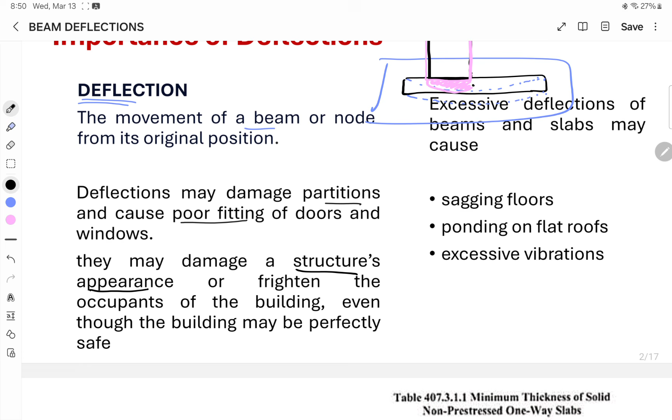You can clearly see it when there's sagging - bending in beams, structures, or slabs. It can frighten the occupants of the building - of course, who wouldn't be scared when it bends, even though the building may be perfectly safe. Excessive deflections of beams and slabs may cause sagging of floors, ponding on flat floors, flat roofs, and excessive vibrations.

NSCP gives the minimum beam depth, which I discussed with you before. Minimum thickness of solid or non-prestressed one-way slabs: for simply supported, we use minimum h of L over 20. For one end continuous, we use L over 24, both ends continuous L over 28, or for cantilever, L over 10.

This expression is applicable for normal weight concrete and Fy of 420. So our Fy here should be 420. If your Fy changes, it's no longer applicable. For Fy other than 420, the expressions in this table shall be multiplied by 0.4 plus Fy over 700. For example, the given is...

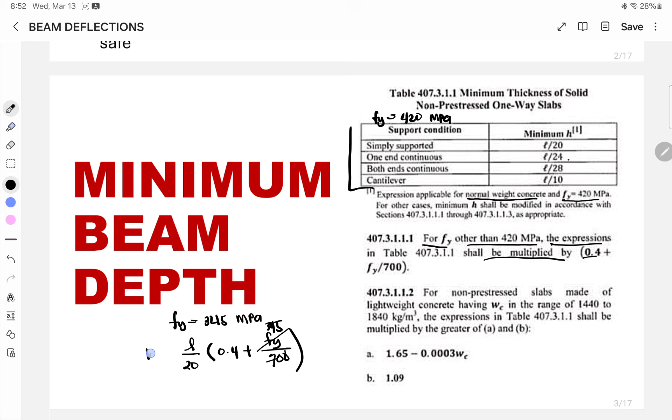Fy is 345, since it's not always 420 that's given to us. So what you do is check the support condition first. If it's a simply supported beam, we use L over 20, but multiply it by 0.4 plus Fy over 700, where our Fy is 345, to get the minimum depth of our beam. Okay.

So next we have the maximum deflections. If the designer chooses not to meet the minimum thickness given in the previous table, he or she must compute deflections. If this is done, the values determined may not exceed the values specified. So this is the limit of our deflection.

We have 4 items here, which also came from ACI and was adapted by NSCP. So we have the types of members, deflections to be considered, and then the deflection limitations.

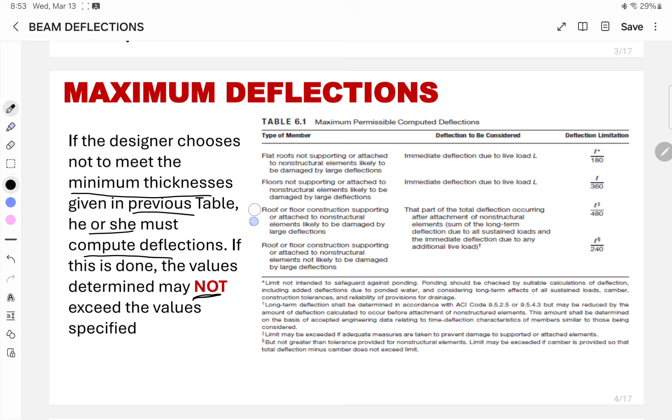The deflection of structural members is due mainly to the dead load plus the live load. So the total deflection we consider here is equal to the deflection of the dead load plus the deflection of the live loads. That's how we consider it.

The deflection that occurs immediately upon the application of the load is called the immediate or instantaneous deflection, which is our focus. According to the NSCP, immediate deflections shall be calculated using methods or formulas for elastic deflections, considering effects of cracking and reinforcement on member stiffness.

So the modulus of elasticity of the concrete shall be permitted in accordance with this section. For concrete it's Ec, and for steel it's Es. Whenever it's indicated as such, it becomes concrete.

The values of the density or unit weight between 1,440 and 2,560 use this formula. So if a unit weight or density is given, just use this formula, plug it in along with the given FC prime, to get your Ec.

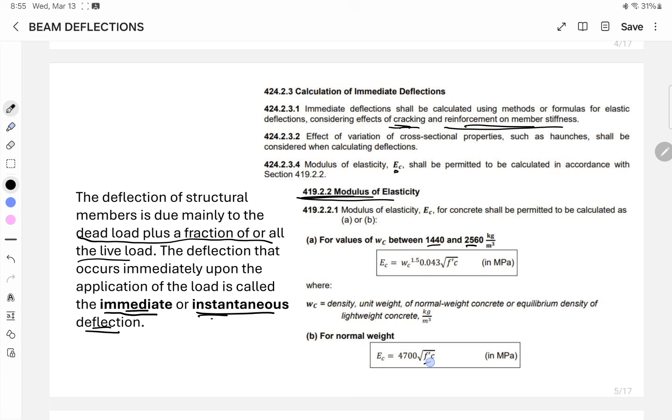Let's move to the crack moment of inertia. Mostly, for example in a simply supported beam, the maximum deflection and maximum moment are always at the center. From our theory, we have M-max. When the moment diagram looks like this,

the flexural cracks here are more numerous compared to the sides. So with that, to analyze it properly, we make a transformed area or transformed section, wherein the transformed section is the section of steel and concrete transformed into a homogeneous section.

From the word homogeneous section, this is our cross section. Then this is the transformed cross section, wherein the transformed cross section is a homogeneous section.

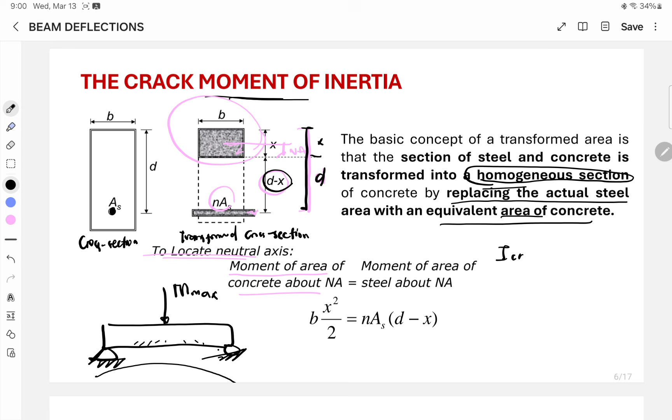Ay, ito na pala, sinulat ko na lahat. So, skip muna natin to.

Dito muna tayo sa modular ratio. Yung modular ratio natin, as you can see, meron kayong n AS is equal to the equivalent concrete. Yung n natin dito is the modular ratio, it is used to transform area concept. It is the ratio of the modulus of elasticity of steel all over modulus of elasticity of the concrete. It may be used to the nearest whole number, may not be less than 6, so hindi tayo mag-less than ng 6.

Ito yung naging equation natin o yung derivation ng n. It is equal to, or the AC is equal to n AS. So we have the equilibrium, AS FS, AC FC, and then strain compatibility, wherein ito na yung n, baliktad, kaya napunta siya dito, o nasa denominator siya. Tapos itong AS FC is just the n.

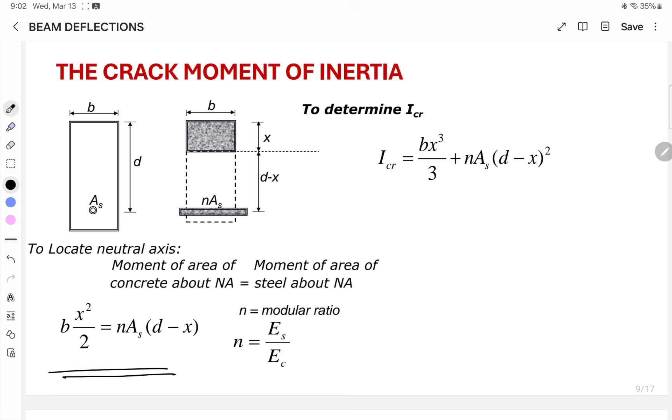So, to determine the ICR, wherein meron na tayong ito, ito yung gagamitin natin para makompute natin yung value of x. Since di natin alam yung location ng x, gagamitin natin yung nakuha nating equation galing dito sa location of neutral axis, where itong b is given, x lang yung unknown natin.

So, with that, pag na-compute natin yung x, punta tayo dito sa ICR, wherein it is the cracked moment of inertia, na meron tayong value ng bx cubed over 3 plus n AS, d minus x, squared.

So saan ba siya galing? Saan ba nyo na-discuss ito, sa statics, mechanics? Basta yung ating ICR is just the moment of inertia, wherein magta-transform moment of inertia tayo. We have the summation of the IG, o the gross inertia, kabuuan, plus AD squared, wherein yung AD squared natin, yan yung magta-transfer ng moment of area.

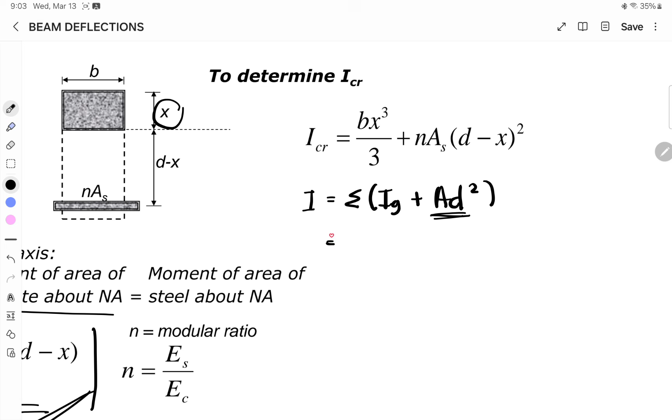So from our figure, ito, we have the IG, wherein yung IG natin is ito na, b, the base, bh cube, x yung height, over 12, plus...

Derive na to, using this formula, ito. Since ang mangyayari lang naman is ilalagay natin lahat ng area, gross area, tapos yung maliit na area na to, as hindi na i-consider, pero ang mangyayari, mali-derive na siya into this equation. So mangyayari, ito na din yung matitira: n AS, d minus x raised to 2, wherein ito na yan, AD squared.

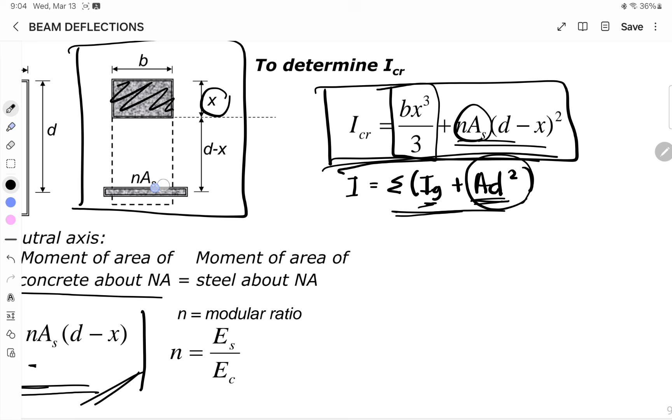So para mapabilis na natin yung discussion, basta ito na yung tatandaan nyo. We have the bx cube over 3, and then plus n AS, d minus x raised to 2.

Sinulat ko na yung derivation niya para baka tanungin nyo pa ako. Dito, ito na yung IG ng una, tapos meron naman tayong pangalawa, wherein yung pangalawa natin, yung initial gross natin, since maliit lang naman yung ito, maliit lang naman siya, yung height niya is super liit lang, tapos i-cube pa natin, so mas liliit pa siya, so approximately equal to 0 na yung nandito.

Kaya dito, hindi na natin kinonsider yung IG ng transform o yung NAS natin. So ang matitira sa atin is ganito ang equation: you have the bx cube over 3, wherein ito na yon, tapos ito na yon.

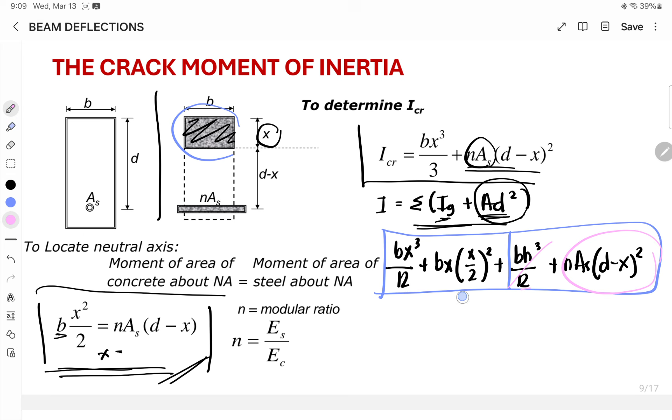Okay, so ayan, patuloy lang natin. Erase natin tong mga ito, erase ko na to ha, picturean nyo na lang, i-post nyo. Yan, ito na yung formula natin ng ICR: bx cube over 3 plus n AS d minus x raised to 2.

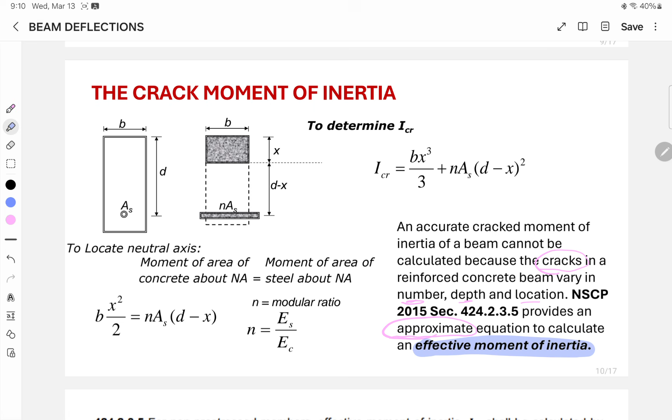Pero an accurate crack moment of inertia of a beam cannot be calculated because the cracks in a reinforced concrete beam and RC beam vary in number, depth, and location. So of course magbabago naman yung mga cracks natin. Kaya yung NSCP daw provides an equation, approximate equation to calculate the effective moment of inertia, so meron tayong tawaging effective moment of inertia na may symbol na IE.

So next, for non-pre-stress members, the IE shall be calculated by this equation, unless obtained by a more comprehensive analysis, but IE shall not be greater than IG. So ang IE daw natin is less than or equal, shall not be greater than IG, dapat ganun yung mangyayari, wherein meron tayong mahabang formula ng IE: MCR over MA raised to cube, IG, plus 1 minus MCR over MA raised to cube, times the ICR. So mayroon ditong mnemonics.

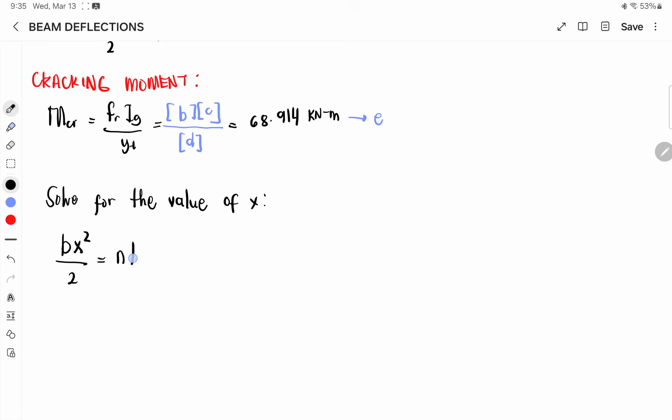bx squared over 2... n AS d minus x squared. Ay, bakit may x squared? Wala yung squared.

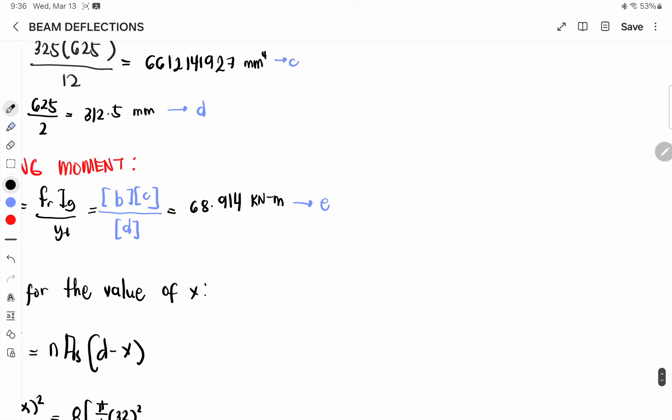B natin is 325. X natin is unknown. N natin is 8. AS natin, di pa natin na-compute, no? Lagay na lang natin dito: pi over 4 times 32 squared... 32 ba? 25, 25 nga. Times 8.

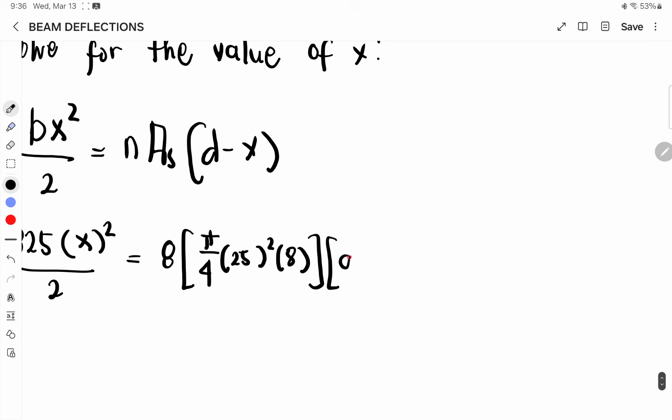D. Ano yung D natin? Given, we have 525 minus X, wherein yung X natin is equivalent to... Shift, solve. We have 236.264 mm.

Therefore, makakompute na tayo ng moment of inertia. Papalitan natin ng kulay.

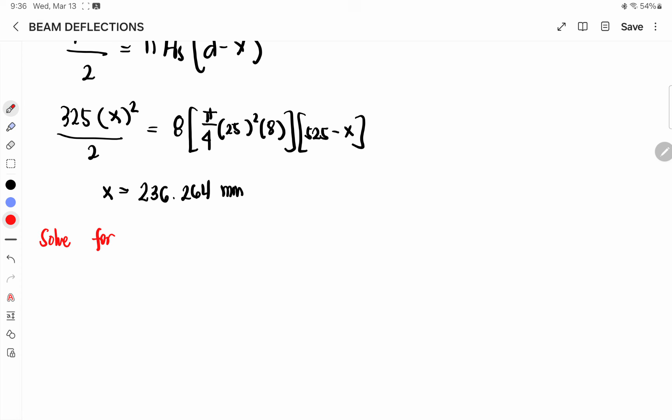Solve for cracking, or effective, or tama, crack moment of inertia.

Wherein meron tayong ICR is equal to summation of IG plus AD squared. We have the IG of the first: bx cube over 12 plus AD squared. We have the B, x times AD squared natin is x over 2 squared plus AD squared, since yung isa, yung kanina in-neglect na natin yun since 0 na yan, no? Magiging NAS D minus X squared.

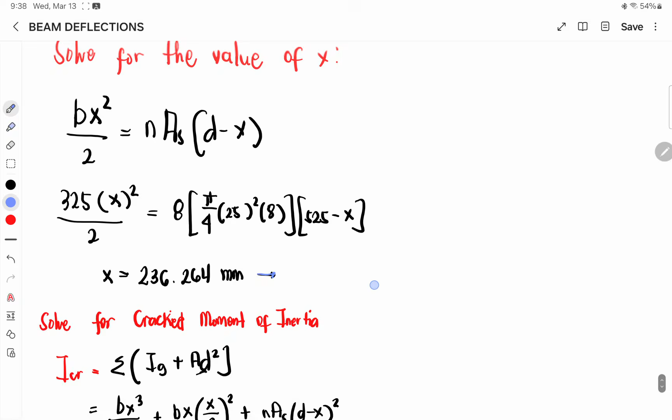Tama. So ito, store nyo muna into letter, ano na tayo? Letter D. Letter D, EFG, EF. B, 325. X natin is letter F. Cube over 12, okay lang. B, 325. X natin is letter F.

Wherein meron tayo ulit letter F over 2 squared, okay lang. Ayun na ta. Plus N, we have the 8. AS natin, store nyo din to: EFG. Para huwag na kayo mahirapan pa. G.

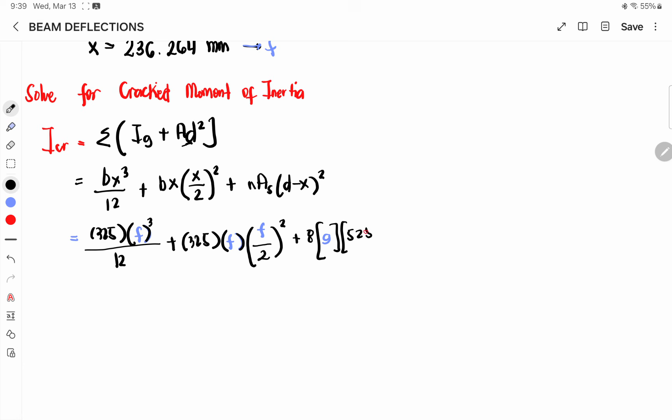D natin is 525 minus F squared. ICR is equivalent to 4047843102 mm raised to the 4th. ICR, no? Moment of inertia in the crack section. Kaya mm squared siya... mm to the 4th pala.

Tapos, makakompute na tayo ng instantaneous deflection.

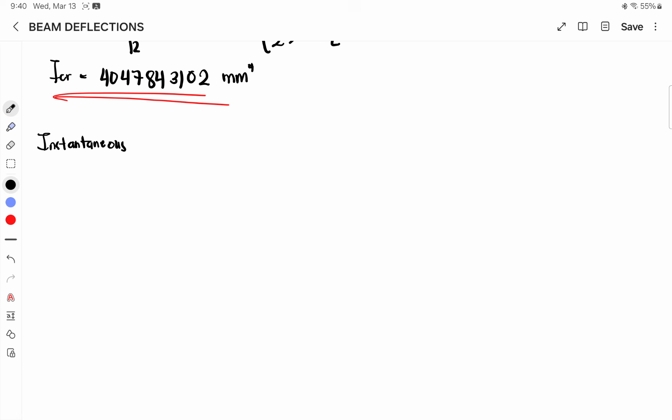First, compute na muna natin yung formula muna pala. IE, MCR over MA cube, plus ay buo, plus ano, 1 minus sira, ay sira. Anong kulang pa dito? Meron tayong MCR, meron tayong IG, meron pa tayong ICR, wala pa tayong MA.

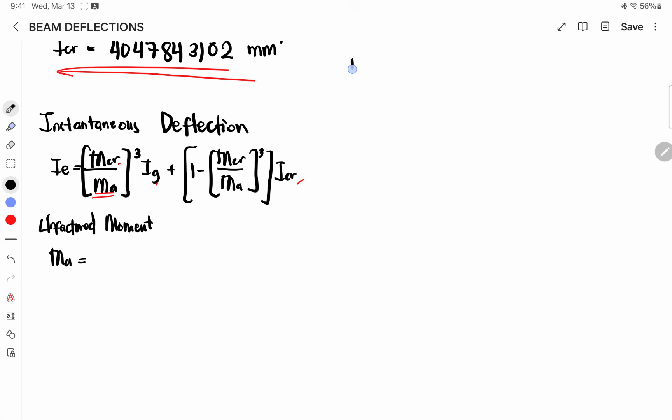The compute for the MA is just the unfactored moment. MA, wherein nasa yung moment natin, kapag sa simply supported is kapag may uniform load is WL squared over 8. Tapos kapag point load naman is PL over 4. So yan ay magiging moment natin: moment natin WL squared over 8 plus PL over 4.

We have the W na 6, dead load, and then the 9 is the live load. 12 squared over 8 plus yung dead load na point load 22 tapos over 4. MA natin is equal to 336 kN meter.

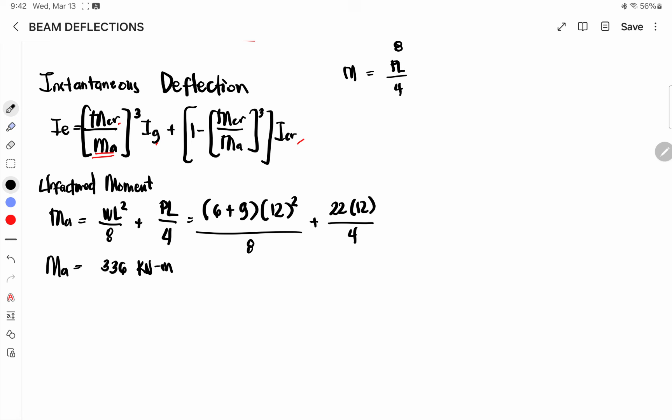Store sa letter EFG. May G pa ba? Wala na palang G, X na to. Hanap kayong G dyan, bahala kayo. So ito yung i-store nyo sa Y.

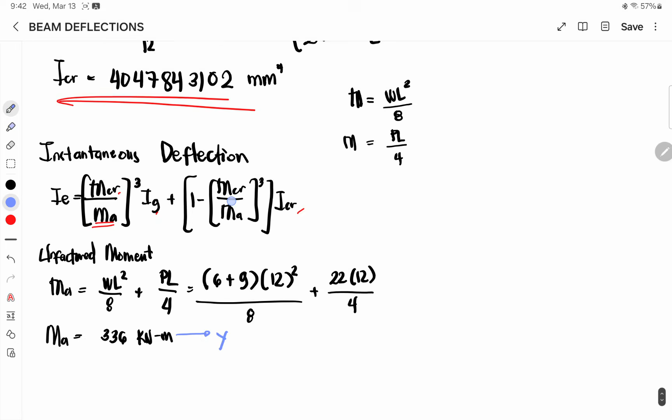Therefore, gamitin natin yung formula ng instantaneous deflection: MCR, wherein yung MCR natin is anong letter yun? Letter E. Tapos yung MA natin is letter Y, cube. IG natin is letter C. Huwag nyo kalimutan nyo na, ilagyan nyo ng label.

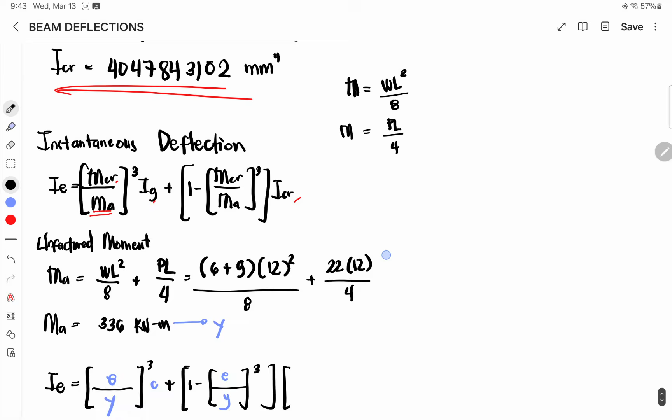Plus 1 minus E over Y, times ICR. ICR natin is, ay wala pa to. So dapat kada sagot lagyan nyo na ng value. So let's say M. So, M.

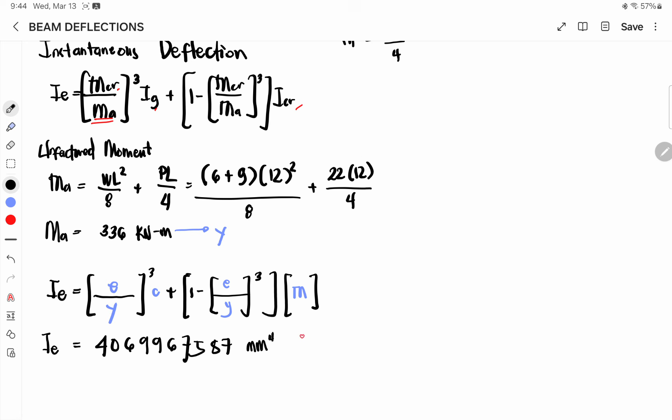Therefore, yung IE natin is equivalent to 4,000, 6,9,9,6,7,5,8,7, which is less than IG. Tama. Pero yung IG nyo is letter C. Balikan nyo yung letter C. O, 6,6. Ito, 4 lang. 4,0. Tama. So, next.

Lawak pala ito eh. Tayo sa kabila. Makakompute na tayo ng deflection.

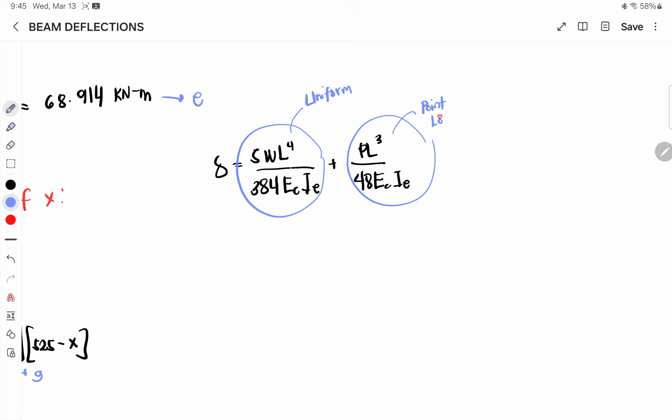Deflection, galing doon sa formula natin: you have the WL raised to the fourth, or 5WL raised to the fourth, times 384 EC times, or over IE, plus PL cube over 48 EC IE. Wherein ito is para sa uniform. So, ito naman para sa point load or concentrated load. Isang oras na pala ito eh.

Deflection natin is 5, we have 6 plus 9, L natin is 12 raised to the 4th, all over 384. EC natin is letter A. Ito, letter A. Tapos, IE natin is letter. Wala pa, natin lang letter. Ano pa ba? Number 1.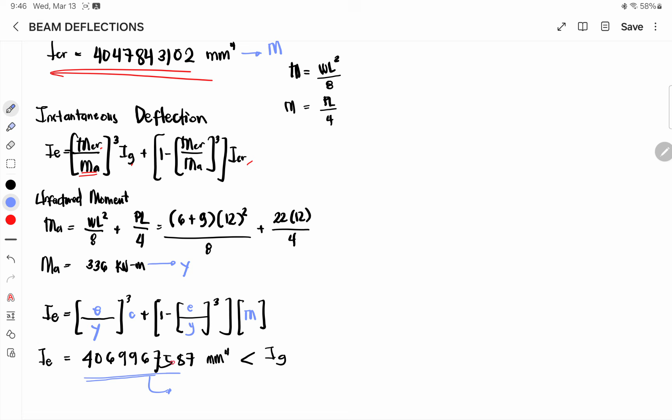Yan na yung EI plus P, 22, L, 12, 3 raised to the third power, all over 48. E natin is letter A, tapos 1, yung I. With that, yung deflection nyo is equivalent to 48.182 mm. Final answer.

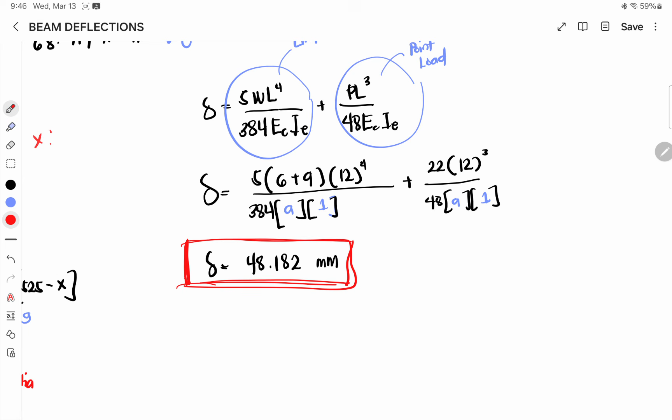Okay, ito yung formula, ito yung solution. So pagkapag tinamang naman instantaneous deflection of dead load lang, ang mababago lang natin dito is yung MA, unfactored moment. So ilalagay nyo lang dito is yung dead load lang, of course. As we substitute na dito sa MA nyo is dead load lang. Okay lang, so pag lahatan, edi lahat i-consider nyo, no?

Yan, so idagdag lang natin. Kunyari may tinanong, hindi na natin patagalin pa to, no? Pag may tinanong long-term deflection, patuloy na lang natin to, itong problem natin. Pag may sinamang calculate the long-term deflection assuming 20% of the live load of LL applied for 5 years or nth years, no? Or nth month. So sabihin natin 5 years din.

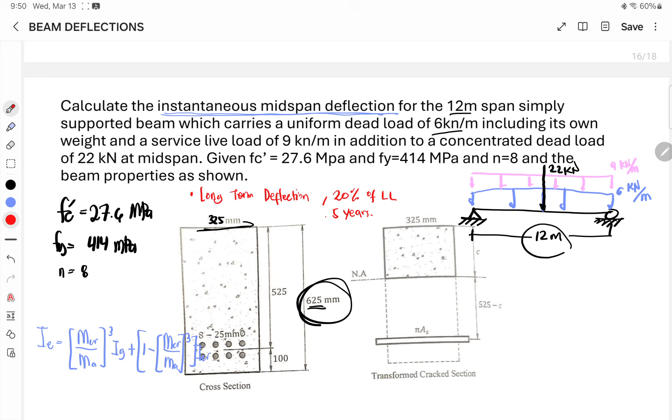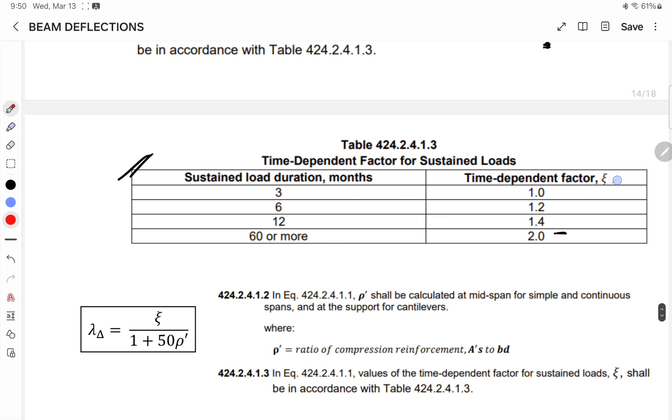So dito masi-check natin yung value ng lambda natin or yung xi pala. So patuloy na lang natin dito. Mababago lang since meron kayong given na 20% live load, tapos 5 years, no? Ang 5 years natin is equivalent to 5 times 12, meron kayong 60 months. Or kapag na-check natin dito sa xi natin, yung time dependent factor is 2.0. Parehas na siya, no? 2.0.

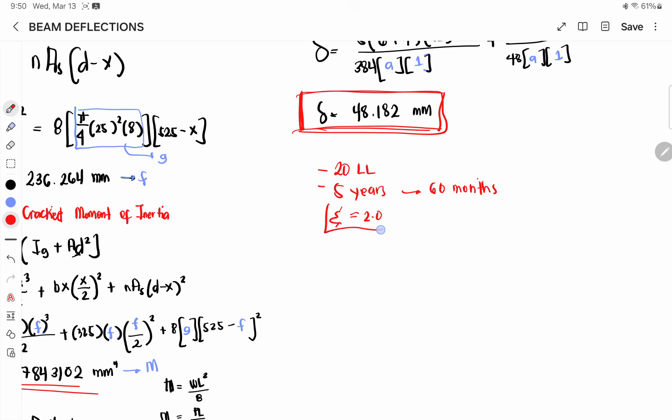With this, ang mababago lang naman is yung moment natin, yung MA natin. So anong mangyayari sa MA natin? Babaguhin lang natin siya. Wherein, kunyari, mag-add na tayo ng 0.2 na live load. So kunyari, meron kayong live load dito pala, ito, sana yung MA. Ito. Itong W natin dito, lalagyan lang natin siya ng 0.2 live load.

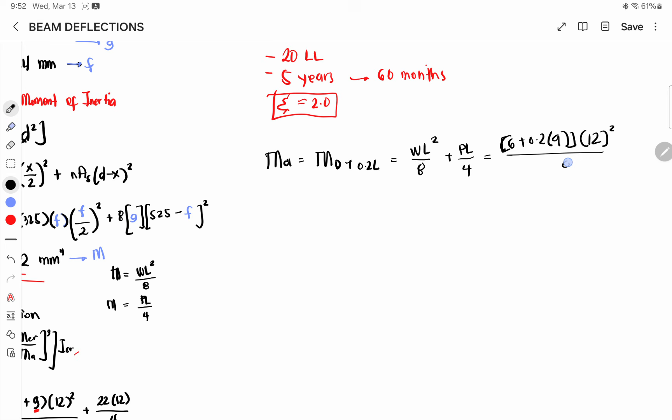So mangyayari, isulat natin dito. Yung MA nyo is just the moment of the dead load plus 0.2 or the 20% of the live load. Mangyayari, we have the WL squared over 8 plus PL over 4. So yung W nyo is 6 plus 0.2 times 9. Nakuha, ganun lang, no? Tapos squared nyo to. Ay hindi, 12, tapos squared nyo, over 8 plus the PL over 4.

With this, makakompute tayo ng moment na 206.4 kilonewton meter. So anong nabago dito sa MA natin? Bumaba siya, no? Sinasabi meron ma-sustain na 20% na live load. Tapos mababago din dyan yung IE nyo, yung effective moment of inertia nyo.

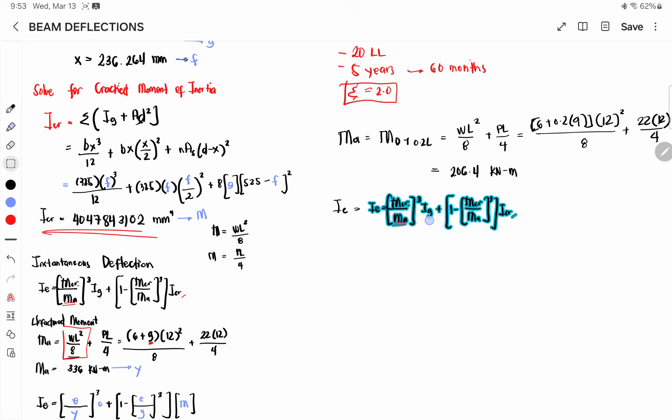Wherein meron kayong formula na, copy na lang natin ito, no? Copy. Paste. Wherein yung MA nyo dito, ito is equivalent na dito, no? Yun lang naman yung mababago dyan.

Tapos makakompute na tayo ng deflection wherein same formula lang, 5WL raised to 4 over 384 EC IE plus yung PL cube over 48 EC IE. So with that, nakakambit din tayo dito. Don't forget to multiply this by 1000 raised to 4, no? Kasi para maging mm siya.

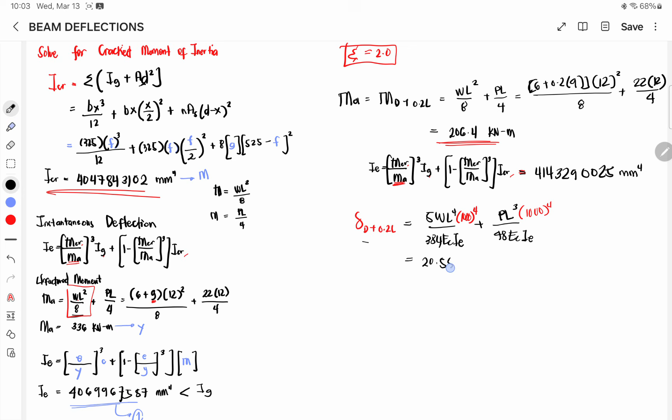Equivalent to sa meron yung value ng 20.585 mm. So yung total deflection natin na mga compute dito, ano yung tanong? Wala pala tayong tanong, no? Gumawa pala tayo ng sariling tanong. The deflection natin continuously after applying for 5 years is ito na yon, no?

Magiging deflection natin for 5 years. Pero kung tinatanong sa atin is total, mangyayari kapag total we have the deflection na na-compute natin, then dead load plus live load plus gamitin na natin yung time strain natin na yung factor natin, no, na ito.

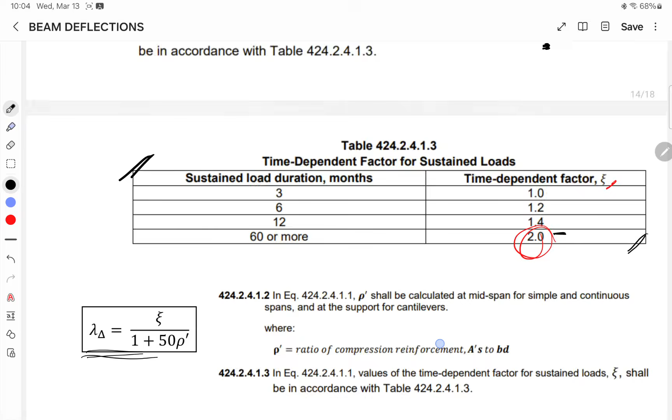Sana yan? Time dependent factor natin. When sa dead load, habang buhay naman siya na andyan, so ang mangyayari, we have the multiplier na lambda. Habang buhay, infinity. So tapos yung deflection ng dead load. Since yung dead load natin sa habang buhay, plus yung factor natin for 5 years, wherein ito naman is for the live load, no? Times the live load na 0.2 daw yung masusustain niya after 5 years.

Wherein ito makakuha nyo by solving this D plus 0.2L, no? And then deflection sa dalawa. Tapos i-minus nyo lang yung deflection ng dead load para makuha mo yung 0.2 live load ito. Kaya ang gagawin nyo dito, sana yan?

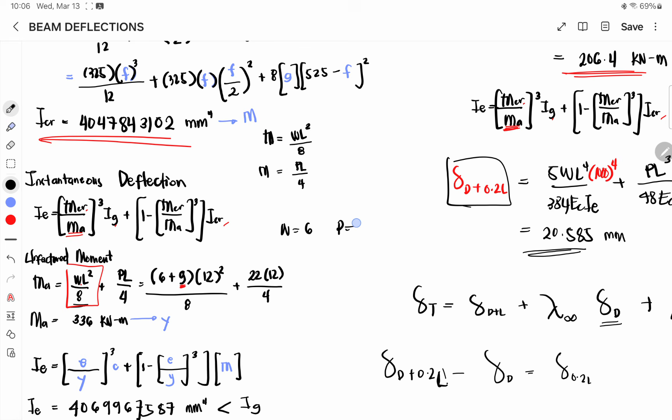Dito sa unfactored moment, para dead load lang yung makuha yung IE, no? Dead load lang din yung i-consider nyo, so hindi nyo isama yung live load. So mangyayari yung W nyo dito is 6 lang, tapos yung P nyo is 22. So ganun lang yung mangyayari.

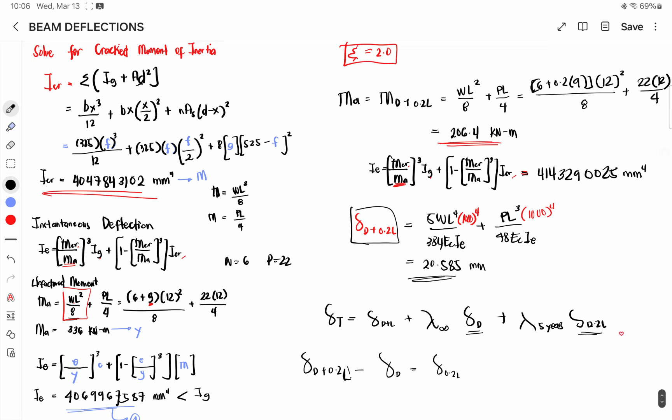Ito na yung problem natin, problem number 1. Tapos, discussion, I'll be sending this PowerPoint or yung lecture natin sa G Classroom. Pwede tayong gumawa pa ng isang example na meron talagang ganitong problem. Okay? So ayan. Thank you.